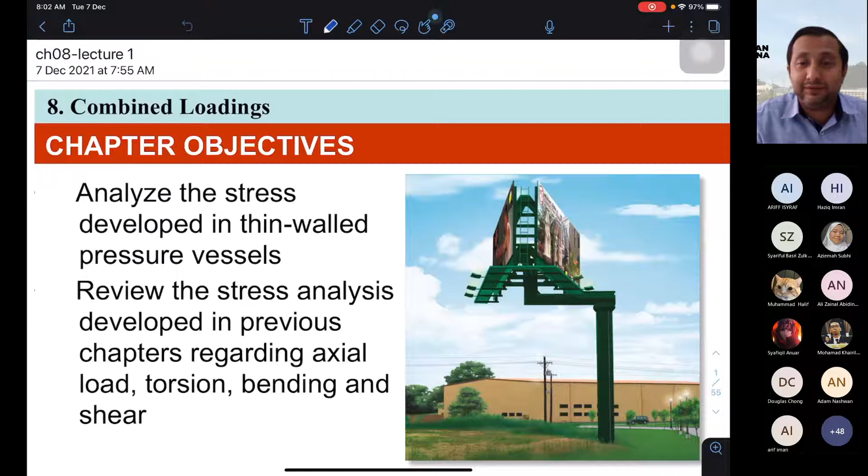Hello? Hello? Hello, Doctor. Hi, morning. You want me to speak fully in English or mix both also boleh?

Mix. Mix, eh? Okay. So I guess this is our second time we are meeting everyone from last year. Apa? Etika, right? If I'm not wrong.

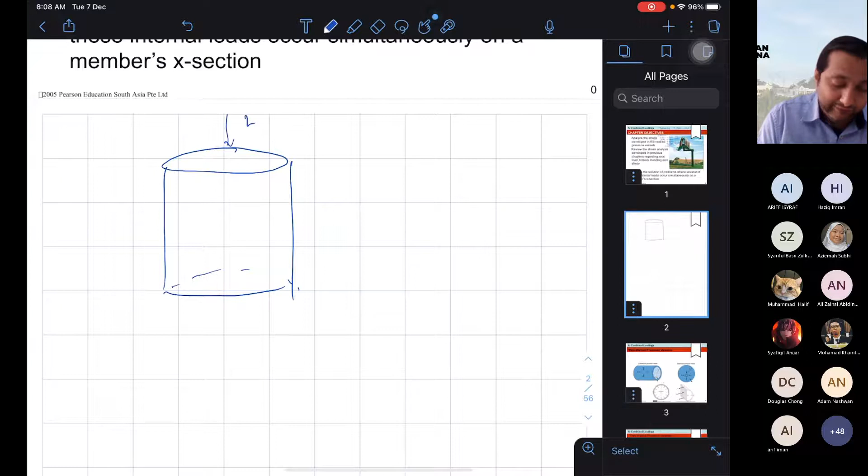Say for example, if you have a thin wall structure, something like this, and this wall structure, you have a certain kind of load, and I want to take one piece here, one component here, so I will always have load onto this, because why? I have a load acting onto the cylinder. It's either thin wall or thick wall, tak kisah. So it will always have a load applied onto the external surface of the cylinder or pipe or whatever.

So we will have two kinds of loading here. One would be horizontal loading, one would be latitudinal loading. So there are two kinds of load acting on a given component.

But if we were to have this place as closed and the load is being applied up here, so we have a normal load, which is P over A. That is two things. We will have an additional of P over A, including the horizontal and also the latitudinal stresses. So this one is what I mean by combined loading.

Say for example, if I have in this kind of case, if I say this is sigma 1, this is sigma 2. So in this case, I will have sigma 1 will be plus with, say, sigma A, it will be sigma A. All right, and also the other one will be sigma 2 plus minus sigma A.

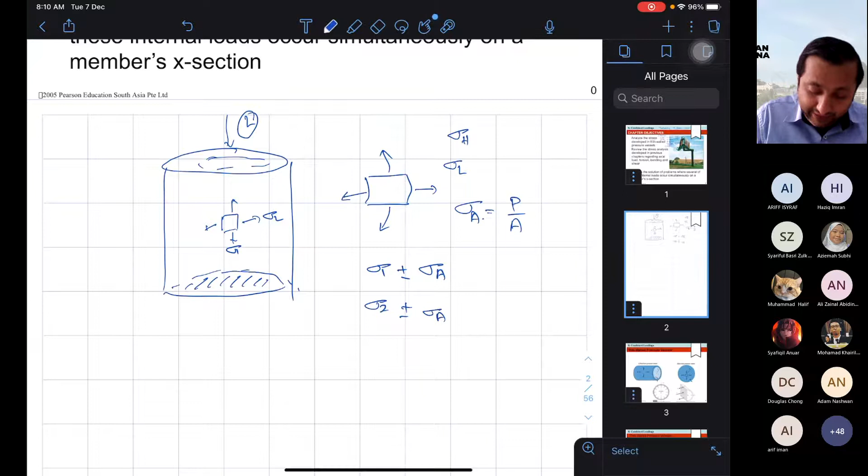Because why? We have to see the difference between the normal load and also the horizontal and latitude loads acting onto the given cylinder. So when a cylinder is being applied load, obviously there will be a combined loading of two loads. One is the horizontal plus minus the normal load, and also latitudinal load plus or minus the normal load.

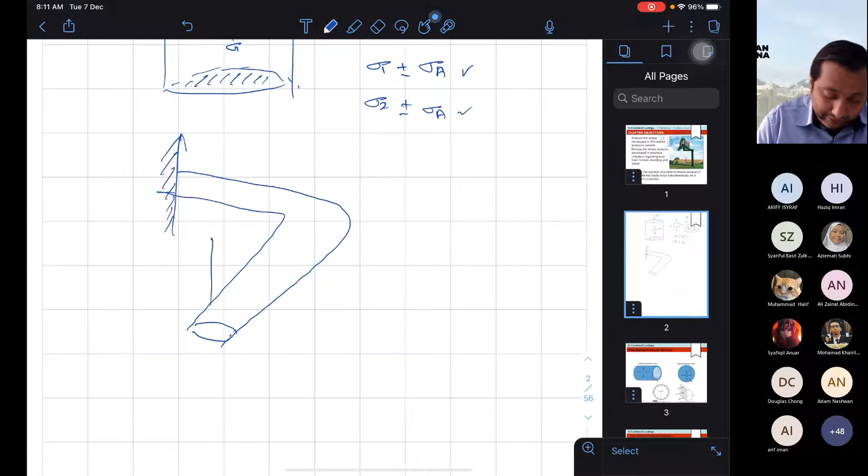But say for example, if I have a shaft, something like this, round, fixed to a wall. So if I apply a load here, so when I have a load here, obviously I will automatically have normal load, which is on the surface, plus minus with the bending moment.

This is actually caused by two things, because when you have a normal load acting onto the component, it will obviously incur bending moment onto the given part. So it's either plus or minus the bending moments or bending stresses of the component.

So we have to say, for example, when we have bending moment and bending stresses, how do I calculate my bending moment and bending stresses? Bending moment, you know how to calculate, but bending stresses will be MC over I, where C is from the centroid and I is the second moment of inertia. So that is how we calculate my bending stresses here.

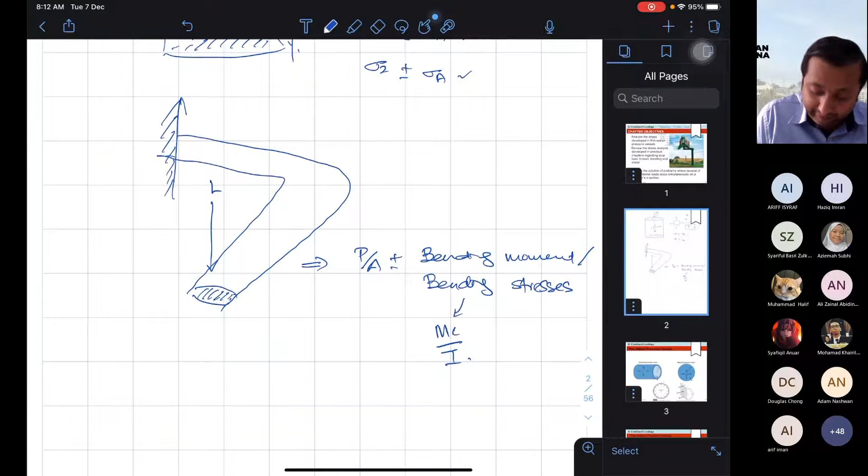Say for example, bending stress. But what happens if I give you a cuboid, something like this? And I give a cross section somewhere here. This is point B, this is point A, for example.

Okay, we have two cross sections and I apply a load given here, or I put a load at the end here. Say for example, on here, load over here. So when you just draw this out, take this out, when you put it here, what do you see?

Well, is there one tension, two compression, and three tension and compression? What do you see at the given points?

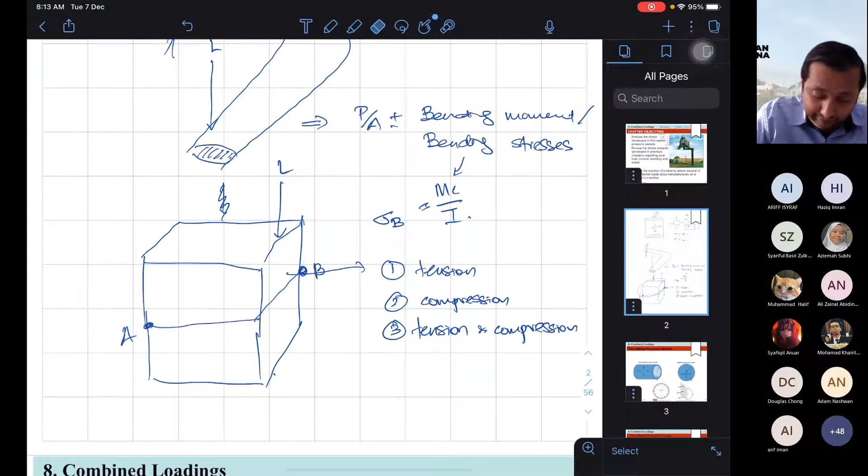Say for example, if I apply a load here, what do I see on point A and point B? Anyone? What do I see in point B? For example, if I have a point here, a point here. So point B, what do I have? Do I have compression, tension, or compression and tension? Which one do I have?

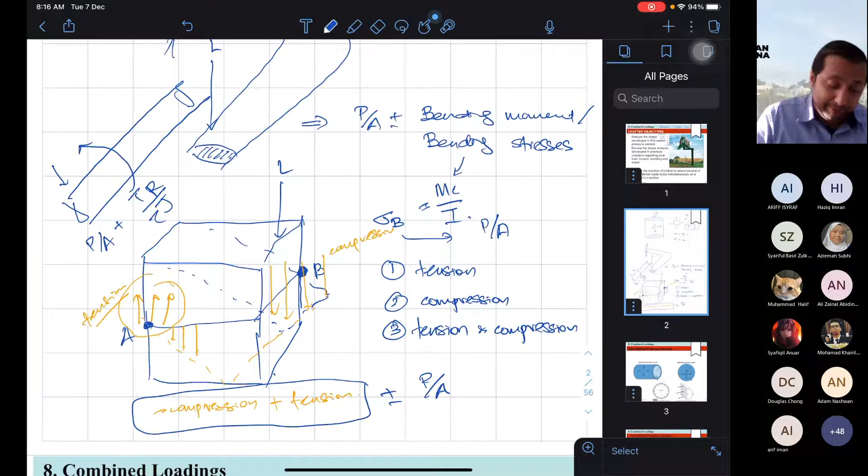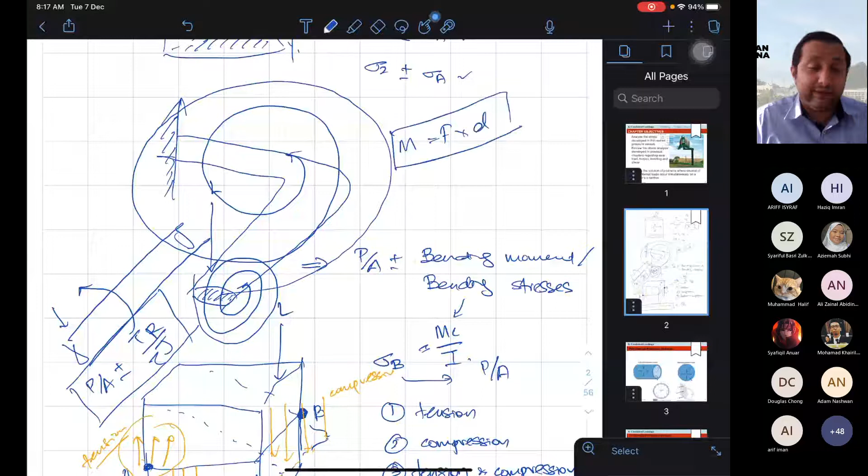So this is what you mean by combined loading. Say for example, if you have a component like this, it is not rotating because it is only having bending moment, because it will bend this way. And if I apply load on this surface, can it have a load this way? Yes, why? Because I will always see the moment. I need to calculate moment. Moment is force times distance. I need to know. So that is how we actually see combined loading.

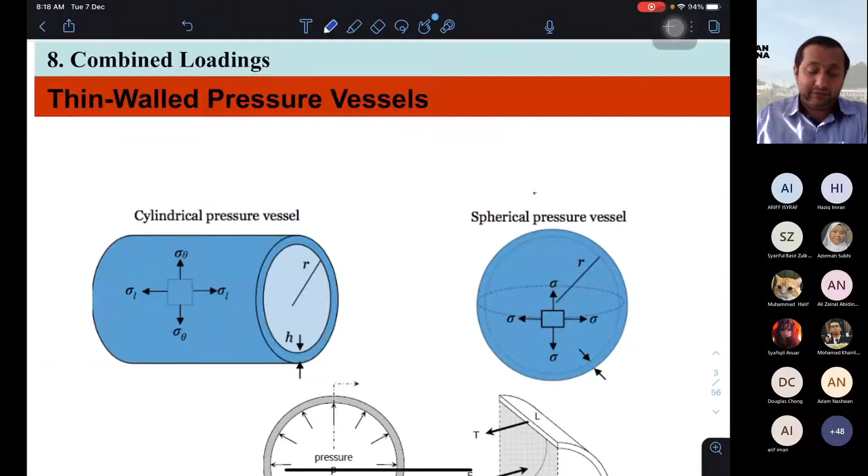Okay, so now we go a bit further. Then we look at thin wall pressure vessel. When we talk about thin wall pressure vessel, we understand when load is being applied onto the pressure vessel. Just imagine if I have a shaft like this, just ignore the inside part. So if I have a shaft like this, where do you think the load is being applied, or the pressure is being applied? Is it latitudinal and horizontal, or just latitudinal, or just horizontal? Which one? If it's just sitting static like this, so where do you consider, in horizontal or latitudinal?

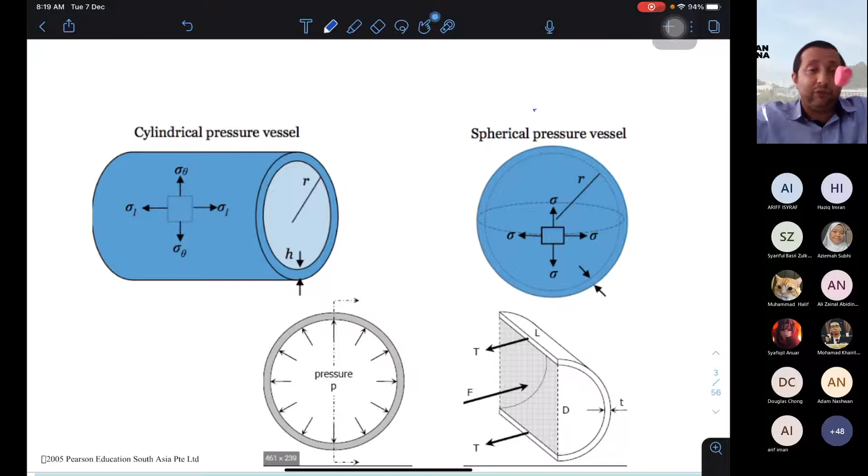Aina Madria, where do you see the loads? You see horizontal, latitudinal, or both? Both, yes, that's true. Because you will obviously have gravitational load, which is acting onto the wall of your cylinder inside. For example, that's why you can see the object inside is in a stable position, it is not sinking, neither is it floating on top. Okay, so that is when we have pressure. So when we cut that, what do you call? If I see both, I will have latitudinal and horizontal stress, even like a pressure vessel. For example, a spherical pressure vessel, or like a ball. A ball also will have latitudinal and horizontal. Why? It needs to have both stresses for it to have equilibrium to maintain its structure.

So now, have you ever wondered why you have a Coca-Cola can? You have a Coca-Cola can, you open it, you drink the water, and then you put hot water. What will happen if you put hot water inside the Coca-Cola can? You finished drinking the Coca-Cola or Pepsi or whatever, and you put hot water into the can. So what will happen?

Badrul Akmal, is Badrul here? So what will happen if you put hot water inside? Where is Badrul? Badrul? Oh, Badrul. Anyone? What will happen to the can, for example?

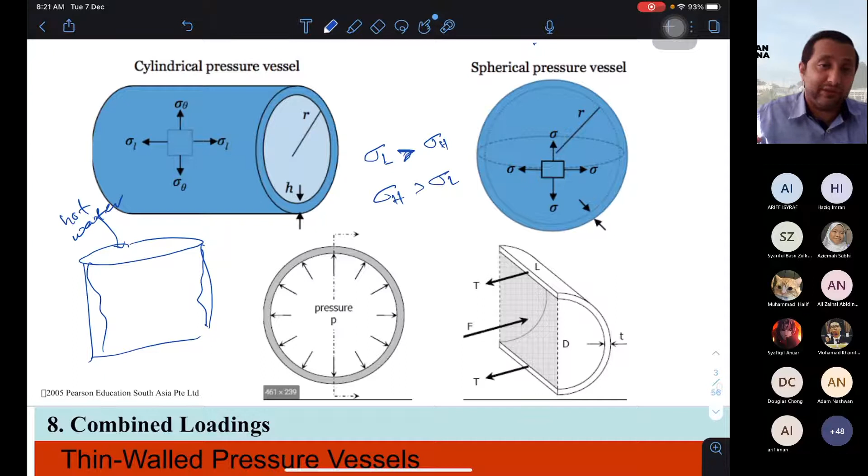Okay, so when we talk about thin cylinder, we will have, for example, sigma 1, which is PR over T, and sigma 2 would be PR over 2T. Why? When we talk about sigma 1, it is always acting onto the surface.

All right, that is sigma 1. Sigma 2 will act here, if you look at the cylinder, onto the circumference of the cylinder. So therefore, we will always use sigma 1 to represent PR over T, and sigma 2 equals PR over 2T, double the thickness.

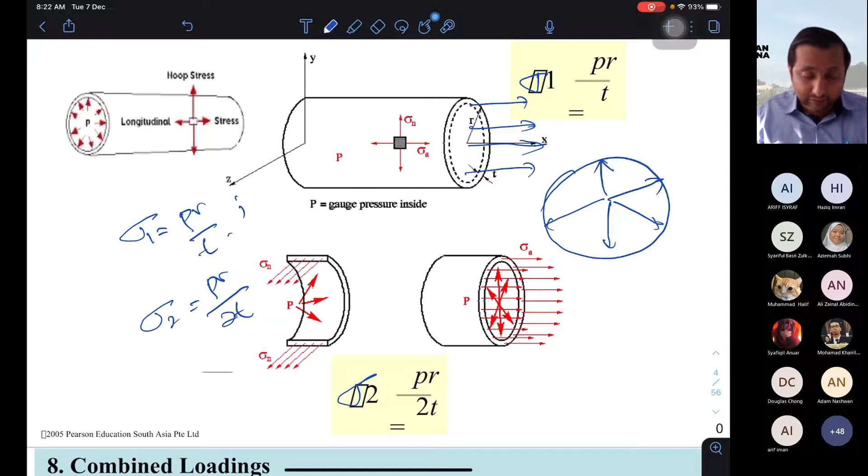So this is how we see our combined loading. If we have a thin wall structure, for example latitudinal stress, we will always calculate as PR over 2T. And if it's a thick wall structure, we will always use this one.

So can anyone tell me how do I differentiate thin and thick wall structure? How do I do that? Anyone? Ratio between RO and RI. Okay, RO over RI. So what is the ratio supposed to be?

And then comes the second question: how do I know what is the ratio? First we know, okay, we know. The thing is thin wall or thick wall, we say based on the ratio. But how do I know? Anyone? How do I know?

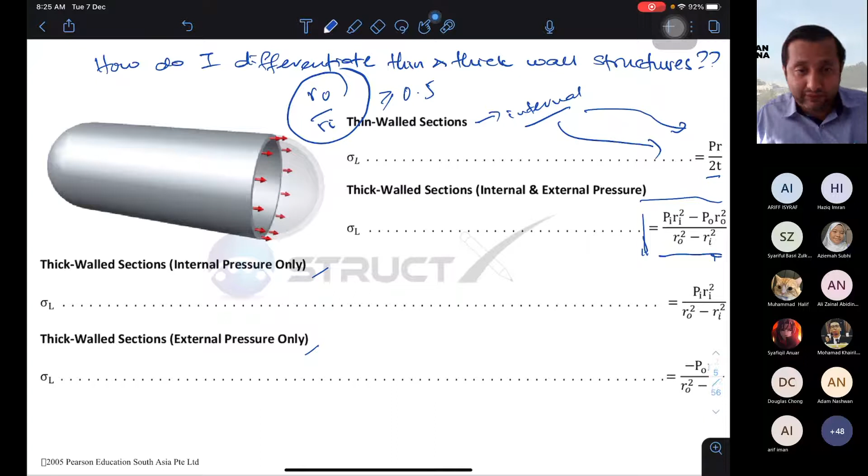So therefore, if anyone asks you, can you calculate for thin wall for internal? Yes, I can, because it's the same. How about the external? Yes, it is also the same, so I can use this. But for thick wall, internal pressure, we have two equations we have to use.

Sorry, that's not that visible. Okay, we have to use this. So there are two, right? So when we look at this, average shear stress, okay. Then with this, I give you a simple example. Let me just add a page.

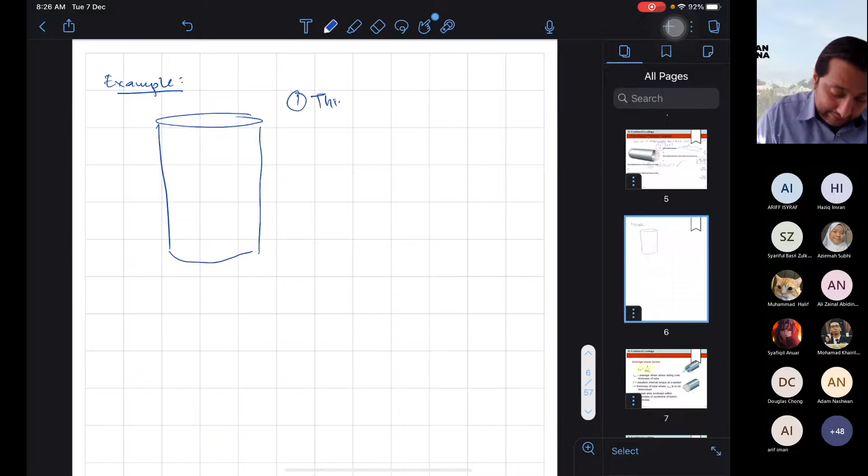Okay, add page. Say for example, if I have a tank, a cylinder tank example. If I have a cylinder tank, all right, I know it's a thin cylinder. One thin cylinder, or thin cylinder pressure vessel, subjected to internal pressure.

It has internal pressure of, for example, 600 kilopascal, and the diameter of the tank is 500 mm. Okay, and I know the thickness would be 6 mm. There are two: one is the internal pressure, and I know the diameter is this one, and also the thickness.

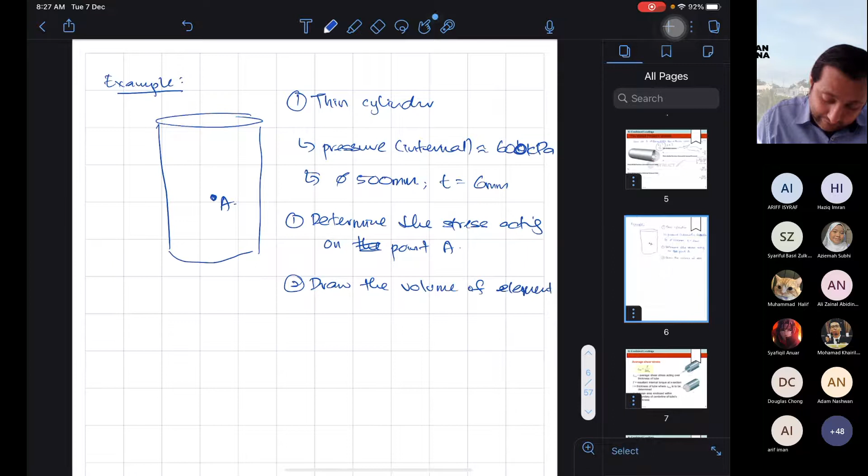So in order for me to do this, I need to determine, first, the stress acting on the given point, say for example this is point A. And second, I need to draw the volume of element at this point, element at point A, for example. I've got two things to find.

So in order for me to determine the stress, I know it is a thin cylinder scenario. So if I know it's a thin cylinder scenario, then it's no problem. I know my stresses: sigma 1 would always be PR over T, and sigma 2 would be PR over 2T. So I know this. But what happens now? I will replace my values.

Pressure being applied is 0.6, because we changed to megapascal. Radius we changed to m, so it is how much? 550 divided by 2, sorry 500 divided by 2 is 0.25, divided by how many? Sorry, 600. This one is divided by thickness, thickness is 0.06. So I will get approximately how much?

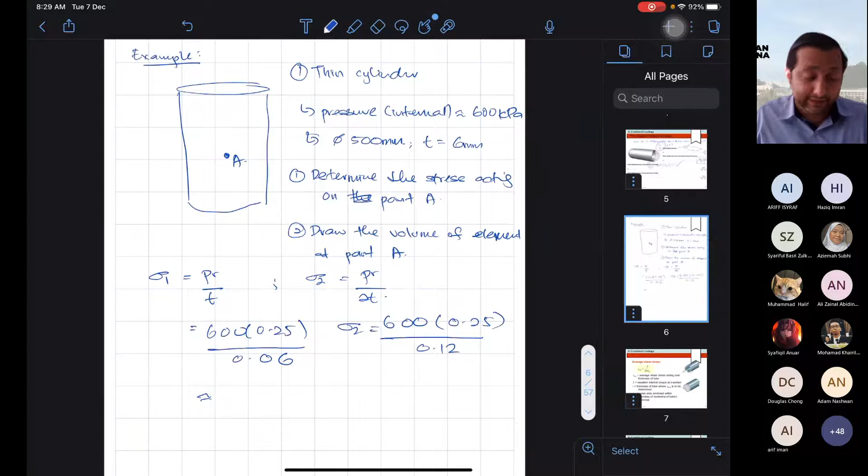So whereas for this will be the same. Sigma 2: 600 multiplied by 0.25, divided by 0.12, because why? I multiply my thickness double. So when I have this, what would my sigma 1 and sigma 2 be? Anyone can tell me, please? I don't have a calculator, I can't press the buttons. So what would your answer be? The answer should be in megapascal, yeah? So what would that be?

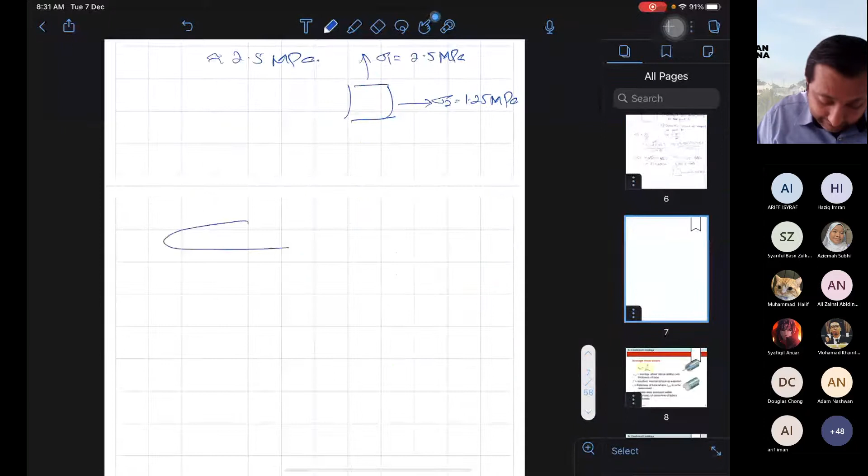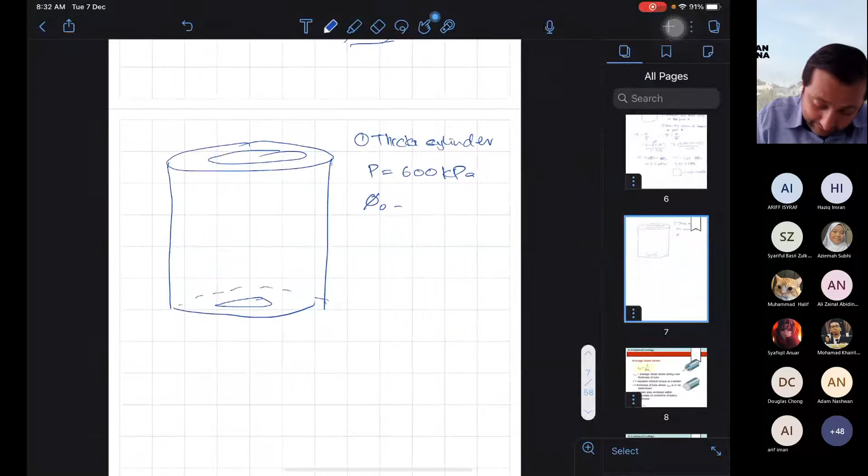So this is a very simple example, but the same example, I give back the same. So I can just draw back the same cylinder. Now we know it is a thick cylinder. I say one thick cylinder. Same thing. Pressure being applied is 600 kilopascal. And then diameter outer is 500 mm, diameter internal is 250 mm.

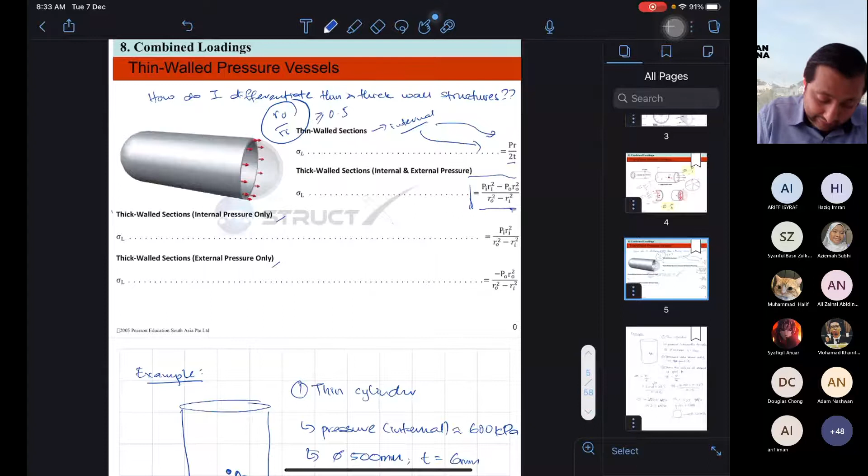So now we know it is another case of thick cylinder. So where was the equation earlier? Can I calculate the thickness of this one? Can I calculate the longitudinal stress? I want to know longitudinal stress. Is it possible? Yes, it is possible. Why? Because I just go back and look at the equation.

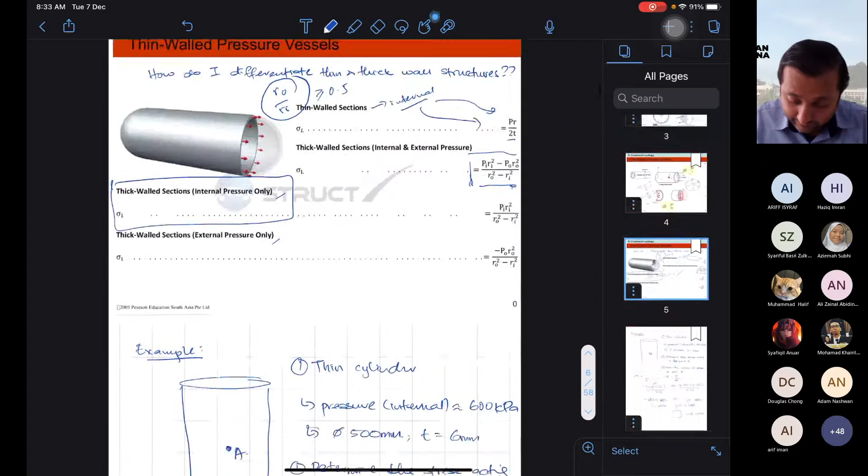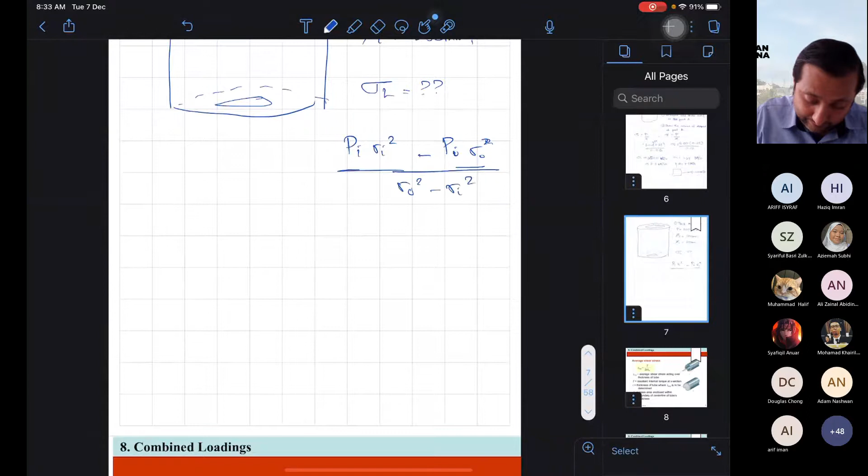What was the equation earlier? Okay. Minus, over. Okay, so it is based on this equation. I want to see the internal and also external pressure. If I want to see the internal pressure, I use this equation. Simple, directly. If I want to know the external pressure, I use this equation. Same. So this is a combination.

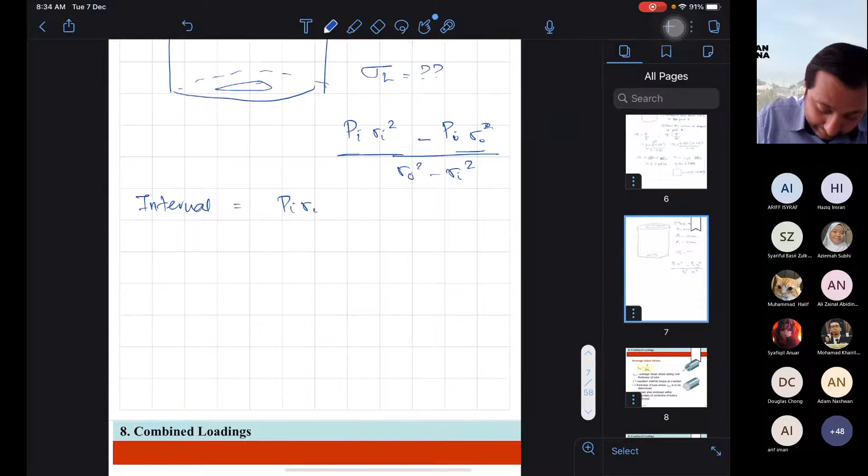If I want to know internal, it will be, going back to the equation, Ro minus Ri. If I want to know external, it will be negative. Okay, great. So can someone please calculate the internal and external pressures? This one is diameter, so radius will be 250, and radius will be 125. Can you calculate for internal and for external? I'll give you a few minutes.

300. Sorry? 300 kilopascal. 300, great. Kilopascal, eh? Yeah. So it will be 0.3 megapascal. Okay, great. How about the external? How about the second one? After this, there is one more example for thin cylinder. Then we go to combined stresses.

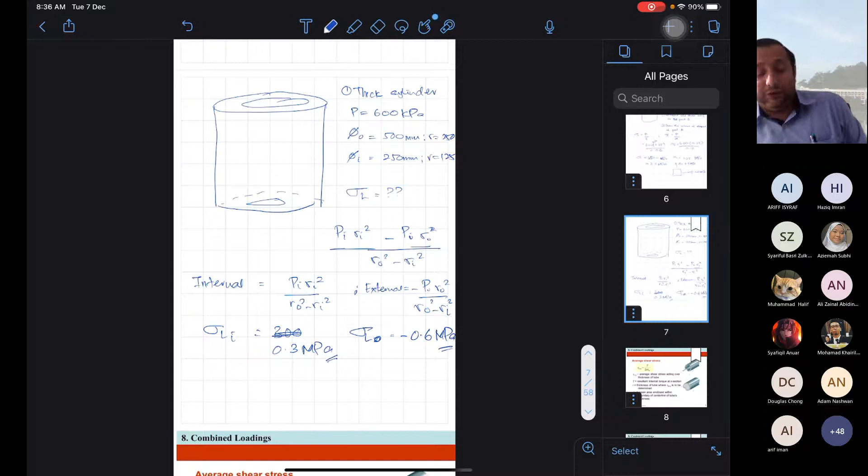Negative 600. Negative 0.6 megapascal. Always remember, please keep your answer in megapascal, don't keep it in kilopascal. Right, so this is how we calculate internal pressure and also external pressure for a thick cylinder. Quite simple. So, what if I have one more question?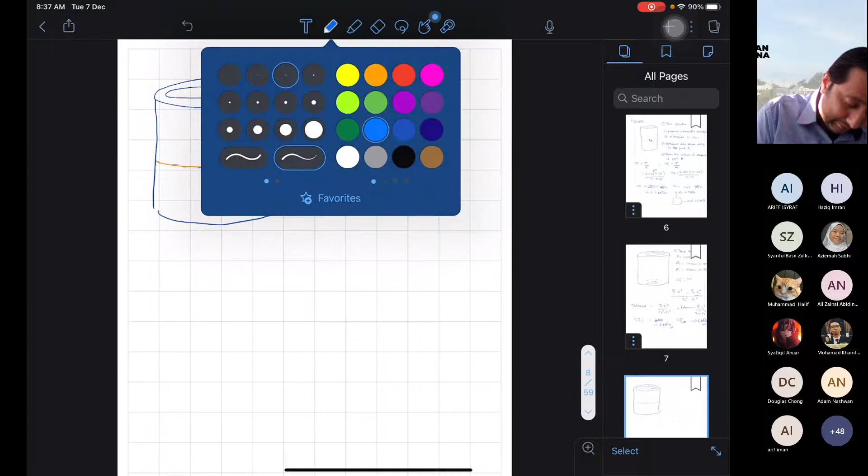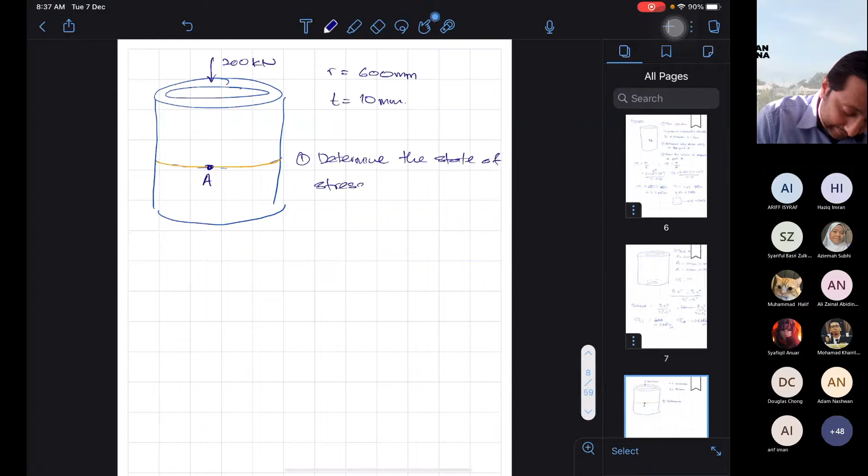Say I have a gas tank, for example. Say here is point A, and I know 200 kilonewton is being applied. We assume this is a thin wall cylinder. Radius is 600 mm. Thickness is, say, 10 mm. This is quite simple, just one only. Determine the state of stress at point A.

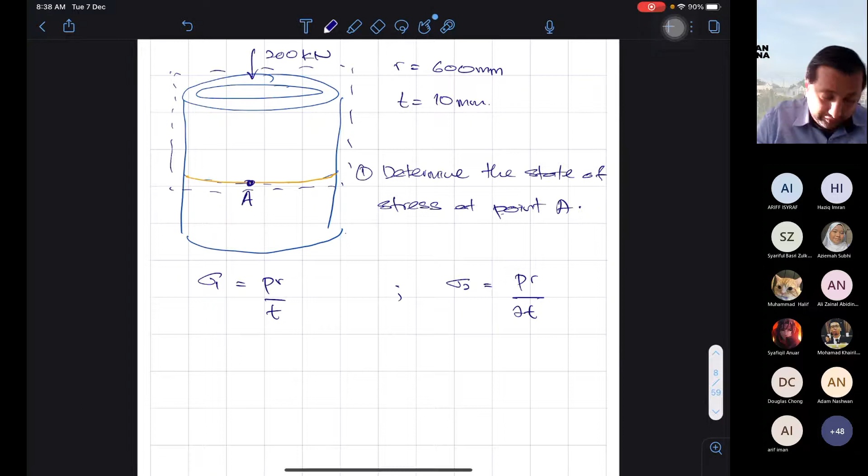Now I want to determine the state of stress at point A. When we look at point A, we know this is a thin cylinder issue. I will always have two things: sigma 1 is PR over T and sigma 2 is PR over 2T. So how do I determine the state of stress at point A? Say I cut this thing out, I have something like this.

Something like this, right? And then I have the bottom part here, which is at the bottom already. Okay, something like this. So I know I apply 200 kilonewton here, and I know I have stresses here. Stress 1, stress 2. Stress 1 is what stress?

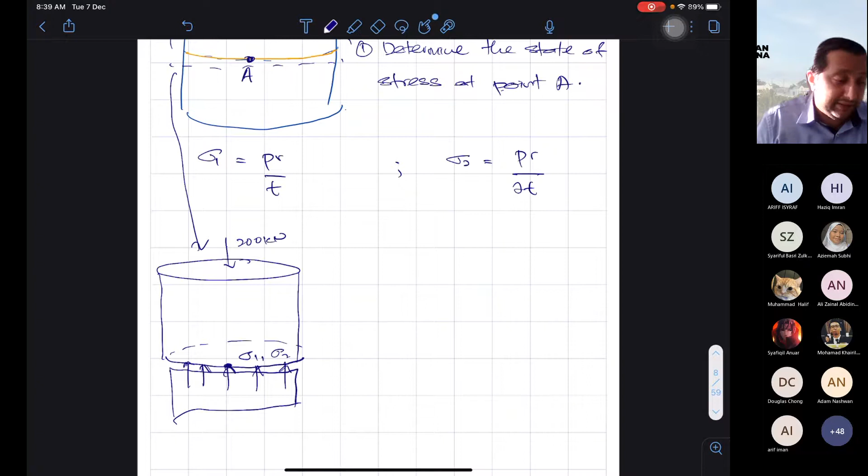So with that, you know you will have plus minus P over A. Because why? Now we assume going down load is positive, acting opposite direction to be negative. So therefore, for the first state, stress is okay, because it is acting here on the hoop of the cylinder, so there's no issue. You will not have any normal stress.

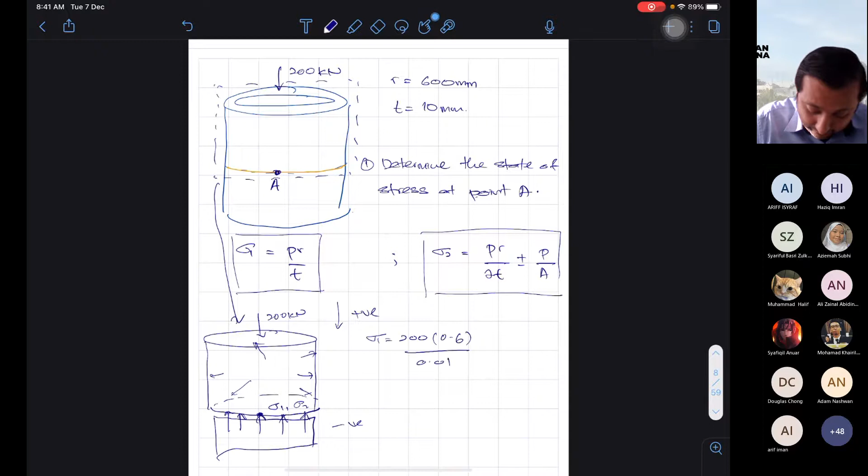But when you talk about this one, you will obviously have normal stress, because you need to maintain the stability or the integrity of the given structure. Therefore you will have a normal stress included into this given cylinder. So let's calculate for stress number 1. Stress number 1 would be pressure, 200 kilopascal, radius around 0.6, divided by 0.01. So you will have sigma 1 as your answer.

How much? And sigma 2 you will have 200 times 0.6 over 2 times 0.01, plus minus P. P would be 200 also. A would be the area. Area will be pi r squared, r will be 0.6. Okay. So for the first one, how much will you get? How many megapascal? 12 megapascal. Okay. So how about the second one?

How about the second one? Second one, this would be 6 plus, positive or negative? That one we have to see our vector. If we say our loading is positive towards down, therefore the normal load to maintain the stability or the integrity of the component will be acting onto the negative region. So therefore it will be minus 200 over the area. So how many megapascal will you get?

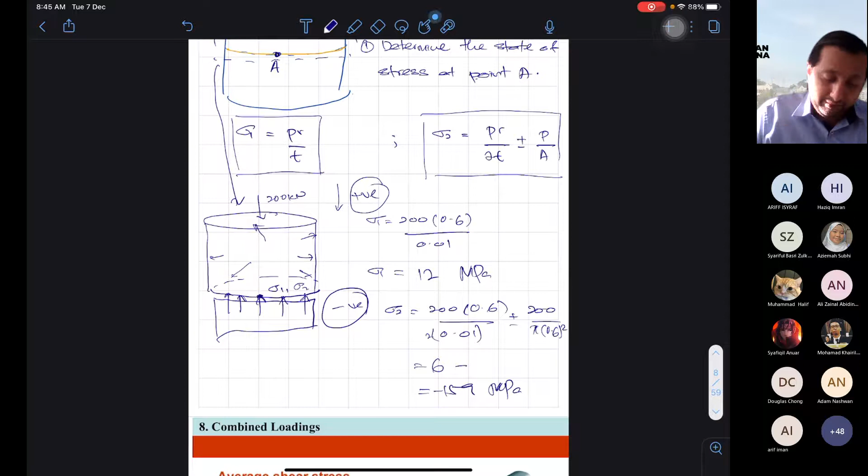But one thing, we're going back up again. Where were we? Pressure vessel. How do I differentiate thick wall and thin wall? Is it the ratio of internal over external? The rule of thumb to determine whether it is a thin wall or thick wall is the radius over the thickness of the wall. So if the radius is bigger than the thickness of the wall, hence it will be a thick wall structure.

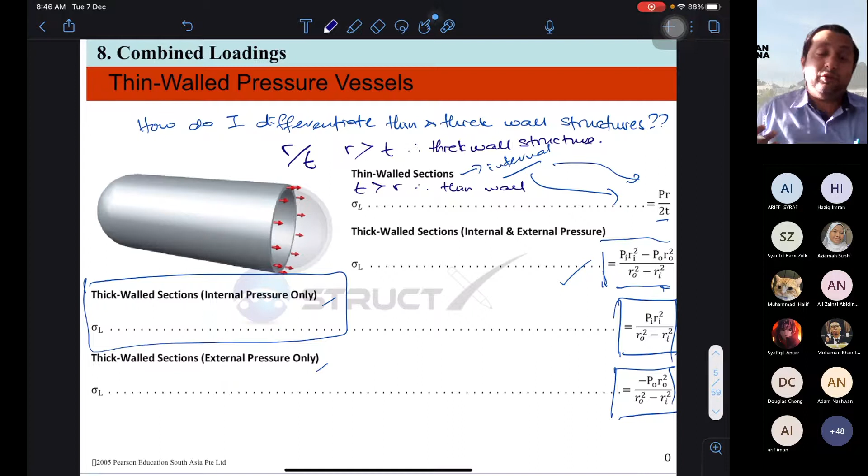All right. If the thickness is the other way around, therefore it is a thin wall structure. So this is how we explain whether a cylinder is a thick wall or a thin wall structure. Okay, so I've given 3 examples. This is a very classical example of combined loading. All right, so now we look at combined loading.

Combined loading, we have average shear stress, which occurs on the surface of the component being applied the given load. So the average shear stress acting over the thickness of a tube, and T will be the resultant internal torque at the given section. If this is a section, there will be a given torque because it is under rotation, and also the thickness of the tube, where the average is determined based on the mean area enclosed within the center line of the tube's thickness.

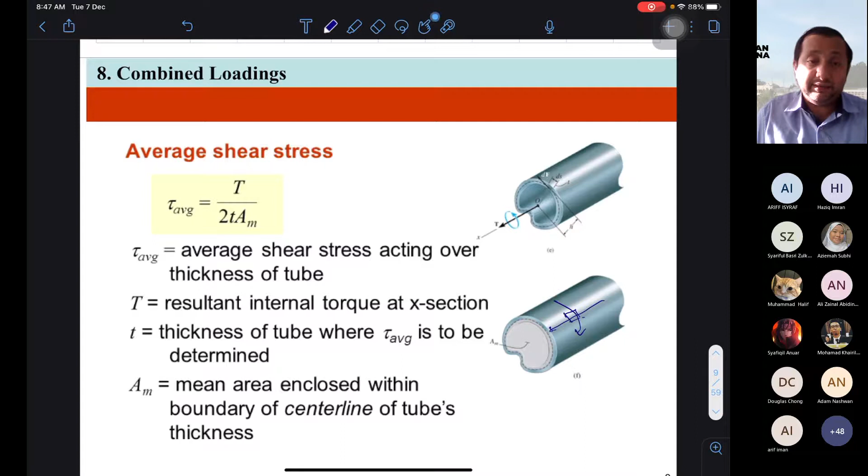So when we look at the first example like this, I know this is my given point, point A. If I'm given a load perpendicular to the normal surface, I will have a bending moment occurring. When I calculate the bending stresses, I use MC over I, where I is the second moment of inertia. But if it is rotational, I will use TC over J, where T is the torque, C is the distance to the point, and J is the polar moment of inertia. Right, just give me a second.

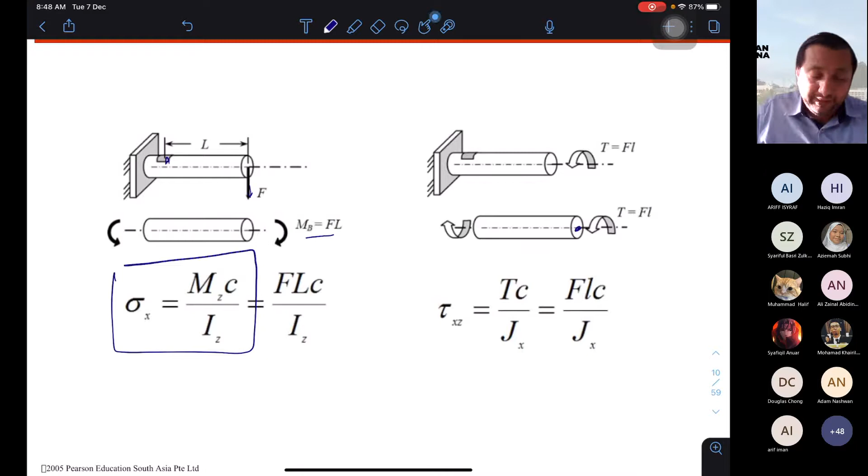All right, so that is how I determine the state of stresses based on the combined loading. But what happens if I have a state of this one? Oh, sorry. Okay, if I have something like this, and I have X, Y, Z, Y, X. Okay, so how many kinds of moments do I have here? Do I have MZ, MX, MY? Am I right? I will have all these three. Or no? Or do I only have MZ if I have loads in three directions?

How many bending moments would I have? If I have three loads, how many bending moments would I have? Class? Azeemah Subhi? Maybe 3, I guess. Yes, 3. Because when you have 3 loads, you will obviously have 3 bending moments. So if I were to put my bending moment here, this is my MZ, MX, and MY. So how will the moment be? Will it be rotating clockwise or anti-clockwise?

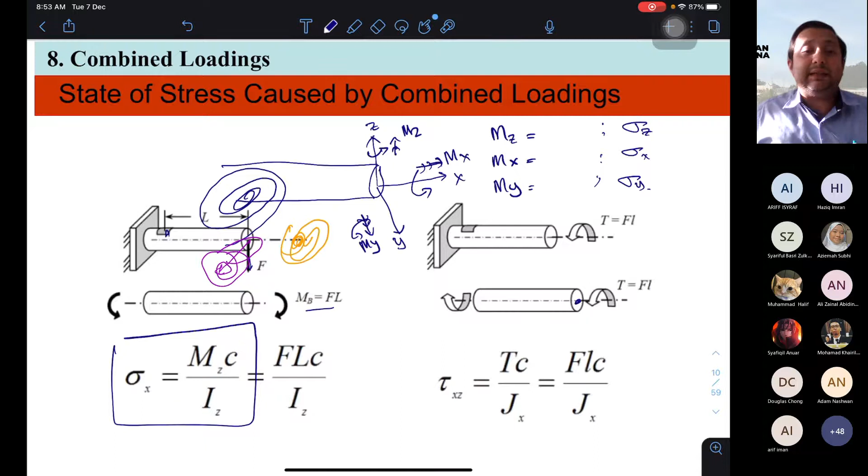So when we look at combined loading, we have forces perpendicular, F over A, some say P over A. I prefer P over A. Bending will be MC over I, whereas the shear stress will be VQ over IT. Q is calculated with A prime and Y prime, so we have to know A prime and Y prime. And for torsion, for normal stress there will never be torsion. For a rotating shaft, you will have torsion based on the given torque and the polar moment of inertia. Pressure vessel is practically normal stress.

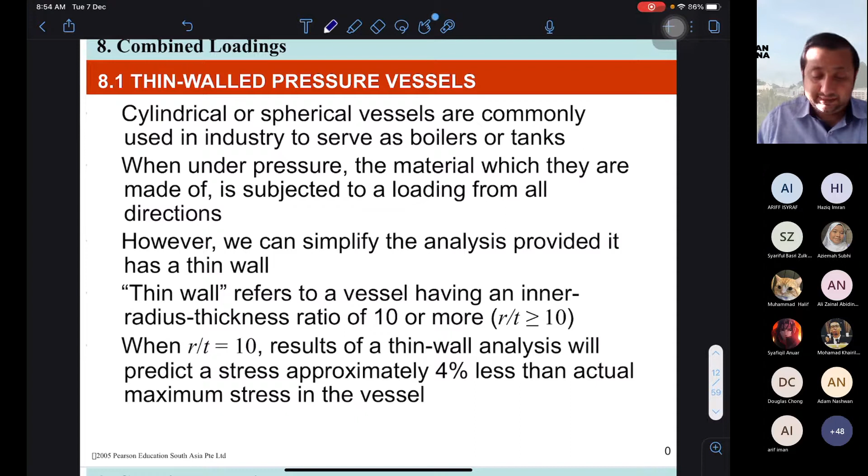Okay, so combined loading. When we talk about thin wall, it refers to a vessel having an inner radius to thickness ratio of 10 or more. So like I mentioned, we have R over T. Then only we know whether it is a thin wall or thick wall structure. With thin wall, the assumption is that the thickness of the pressure vessel is uniform and constant. If it is different, then we cannot calculate it.

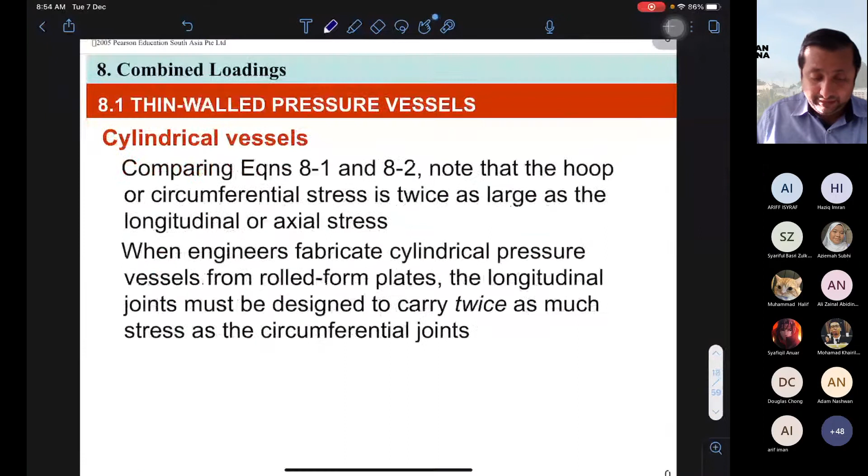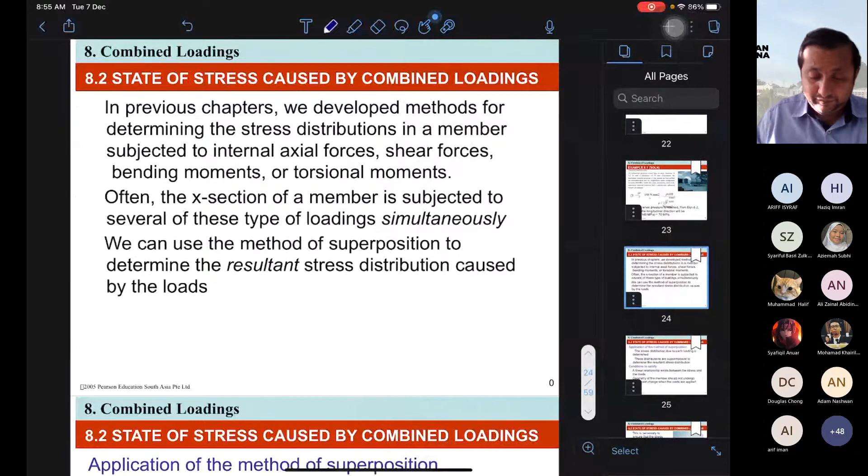Before we go to thin wall, this we've covered. Combined thin wall, we've done the example. Cylinder, yes, and radius for cylinder. This is the example we have done; it's actually in your textbook. So I go straight to slide 20. What's this? 23, and I add one page. So now when we look at a cylinder, we know a pipe.

Okay, a pipe is fixed. And this pipe is to transport, say for example, oil. Oil coming in. Okay, we know the diameter is 4 mm. The thickness is 0.2 mm, for example. And it carries oil or water, whatever, a load of say 0.6 megapascal.

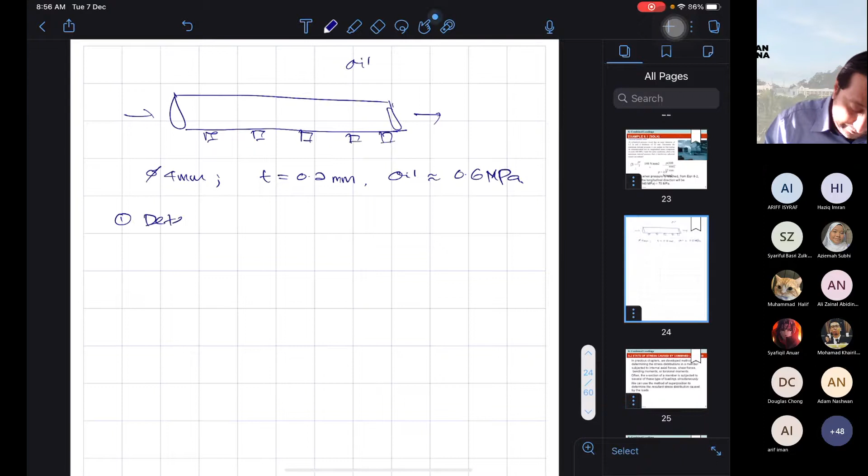Okay, now I want to determine the state of stress in the walls of the pipe. So now I know this is a pipeline coming from a refinery, an oil pipe, and I know it has a thickness of 0.2 and this diameter. So what I need to know is how to solve. We know how to calculate.

We know it's either using PR over T or PR over 2T, because why? It is occurring along the entire part, and I'm not concentrating on a given point, not even point A. No, it is not a given point, it's for the entire pipe. So when we talk about the entire pipe, we know there will be either this or this. But it goes back to the question. Thick or thin? So how do I solve this?

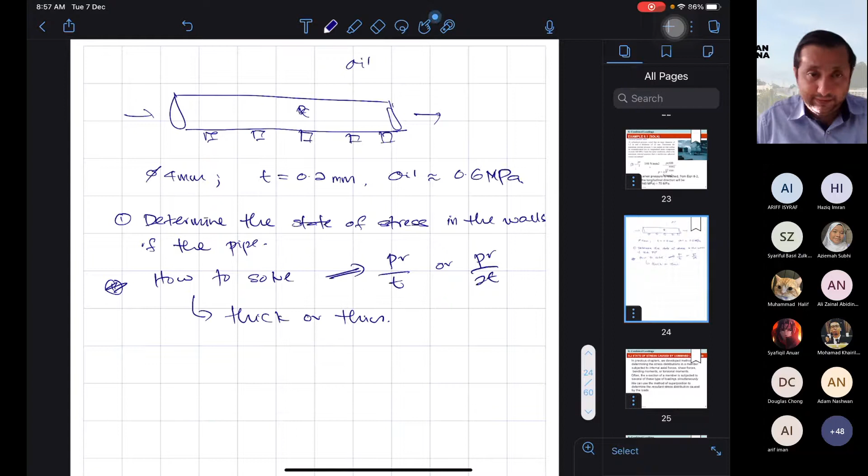Thick or thin? Thin. Why do you say thin? Because it's exactly a ratio of 10. Exactly? What's the ratio? The ratio is 10. Okay, exactly then. So when we say the ratio is equal to 10, approximately 10, we say we use what? Thin. So when I say thin, I can always fall back on this or this.

Okay. Now, the question is, which one should I use? Should I use sigma 1 and sigma 2, or sigma 1 only, or sigma 2 only? Which one? We have to look at the pipe itself. If the pipe has open ends, open here, therefore we do not need to calculate this. Please bear in mind, if a pipe has open ends on both sides, left and right, that means we can consider there is minimal load applied for the second stress. So therefore, we only calculate PR over T. Alright?

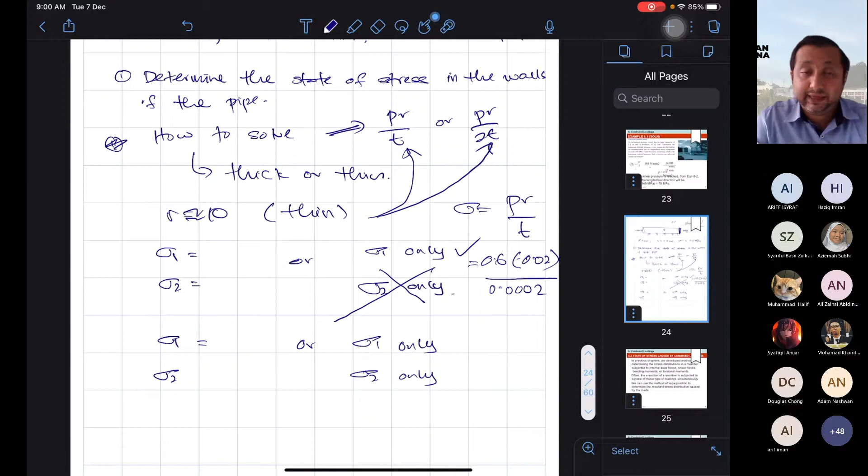Earlier I said because it's open, you only calculate sigma 1. But now in this question, I say it is closed. One side is already closed. So how do I calculate? Both, yes. We calculate this one and this one, because the loads will be acting on the walls horizontally and latitudinally, or some people say hoop stress. Same thing. Alright, that is how it is.

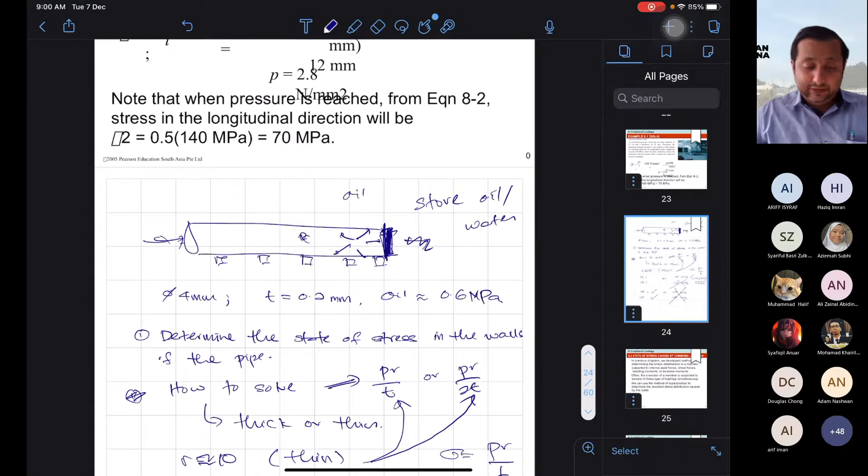Okay. Now we go to see the state of stresses combined, or superposition. Superposition means we have both stresses: normal load and also bending. Then we have a case we call superposition. If it's rotating, you will have normal load and also rotational load. Like earlier, that is considered superposition, a combination of two or more stresses acting on a given point.

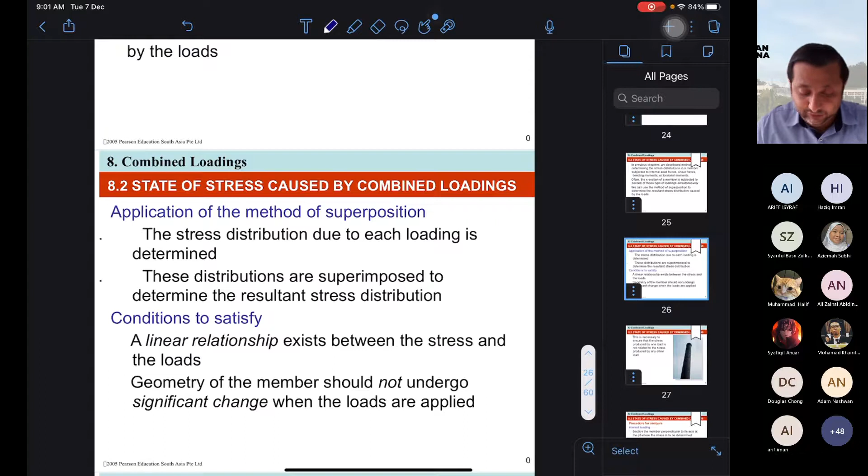So we assume a linear relationship between the load and the stresses, assuming the geometry of the member does not undergo significant changes when loaded. This is how the calculations are, but I'll go directly to an example. This one you can see in the notes; I won't give this example, I'll give another one.

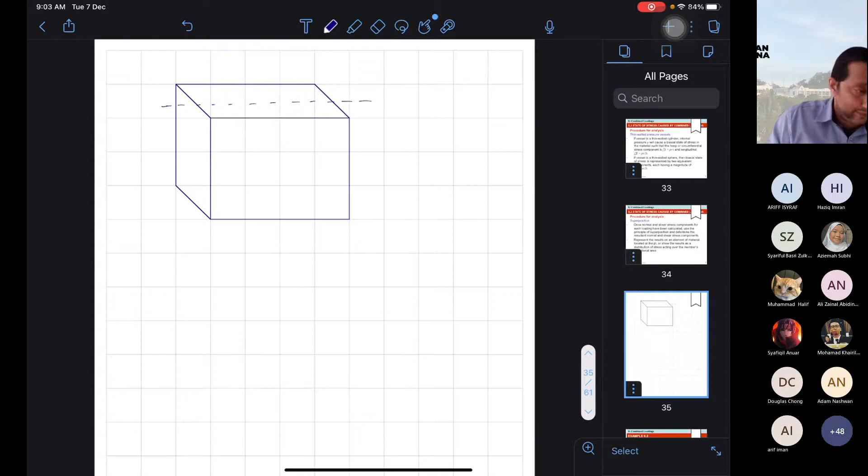Okay. Say for example, if I have a cube. Okay, if I have this, and I know there is this center line. Di tengah, titik tengah. Okay, and I have a load being applied here. I have load at this point, 300 Newton, or say for example 300 kilonewton. I tahu jarak ni, say 50 mm. And I tahu this jarak is 150 mm.

Okay, we have this. So now what happens is ni berkurang. So I have this point acting here, which is here at the front sector. Oh, tak apa, allocate balik, sorry, my mistake. Figure tak betul, sorry. Okay, so draw back. Okay, if I have something like this, much better, correct.

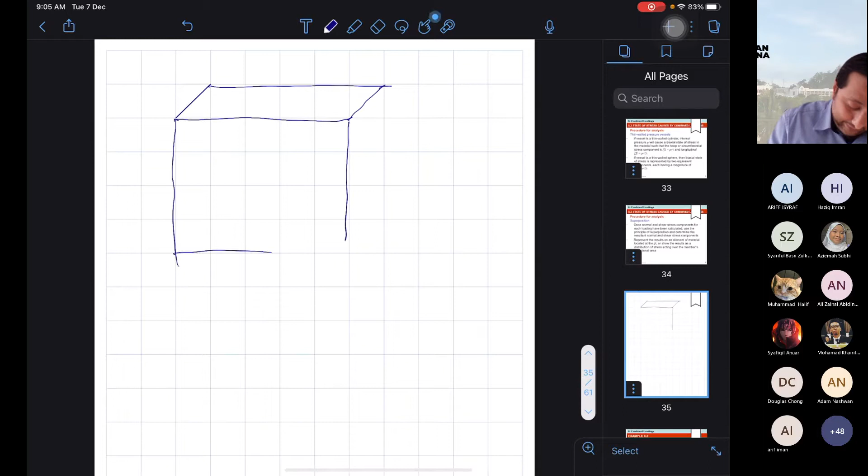Okay, if I have something like this, sama juga, if I have the load 300 kilonewton, and I know jarak dia tengah sini is 50 mm. This is 150 mm. So this is one point in the center, or maybe not center, up to me. So this is point C. This is point B. Okay, we know a force of 300 kilonewton is being applied to the edge, say point A. We know point A at the end there.

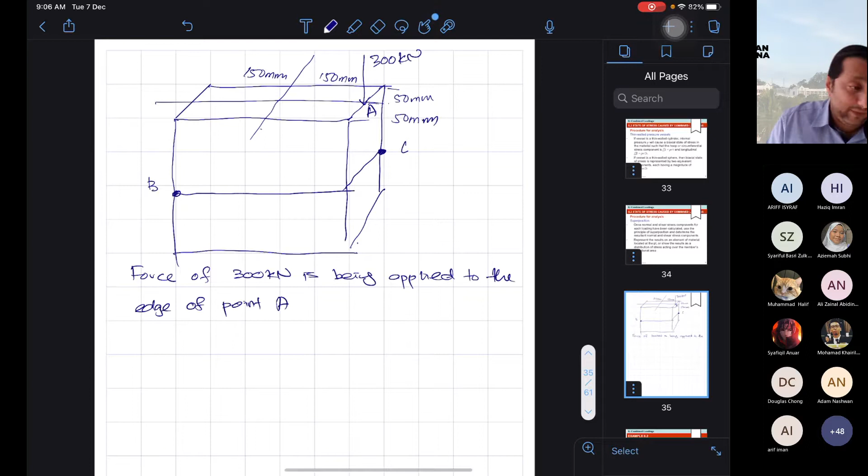So I want you to determine, one, the state of stress at points B and C, both given points. So this one you have to pay attention also. And then second, the distance x based on the resultant force, or the stress distribution. Okay, so we have this. Okay, great.

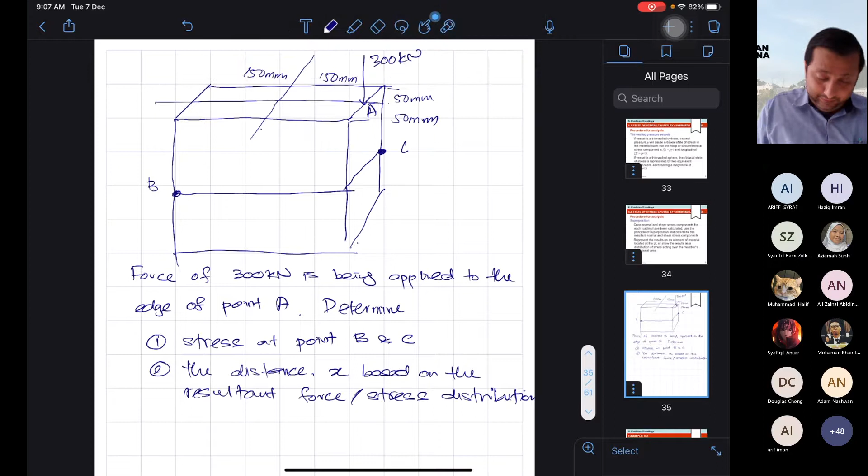This is clear. Apa ni? Okay, we have this. So how do I solve this? What am I trying to find? I'm trying to find the stresses at point C and point B. Betul. But I know what's happening at point A. So how do I do that now?

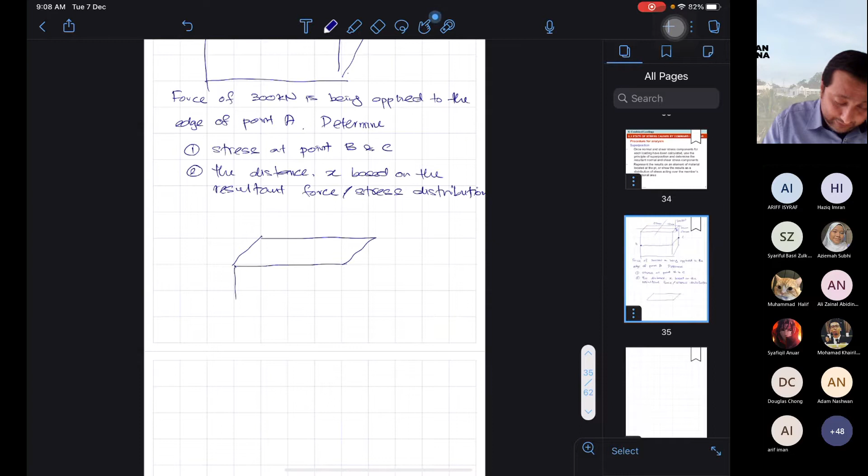So whatever happens on point A will be a resultant from the centroid of the cuboid. It will occur in the centroid of the cuboid. So what will we have? Point C, point B, when load is being applied here, 300 kilonewtons, what will happen to C? Will C move down or move up? Will it have compression or tension? Compression. Obviously, it will start to have compression.

Good. So what about B? B will be the opposite, or resultant load acting in the opposite direction, so takkan dia duduk turun macam ni, because load is being applied at the end. If it's being applied at the end, this will be apa? Tension or compression?

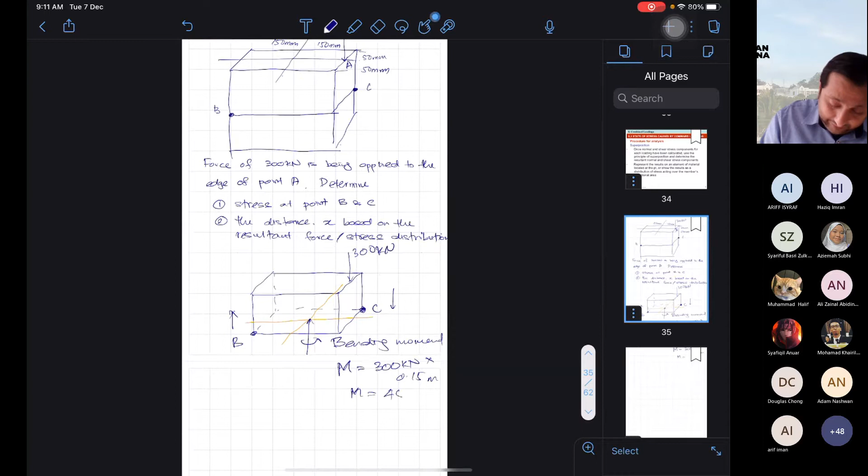So what is the bending moment here? The bending moment is calculated as M equals to 300 kilonewton multiply with the distance, which is 0.15 meter. So you will have approximately bending moment of 45 kilonewton meter. Okay, you following me?

So you have that bending moment. So there are two components to solve this one. One is my normal force, calculated as P over A.

What is P? P is the pressure load being applied, which is 300 kilonewton. A would be the area of the cuboid, which earlier I gave, 0.3 times 0.1, meter square. So 300 divided by 0.03 equals 10,000 kilopascal, which will be 10 megapascal.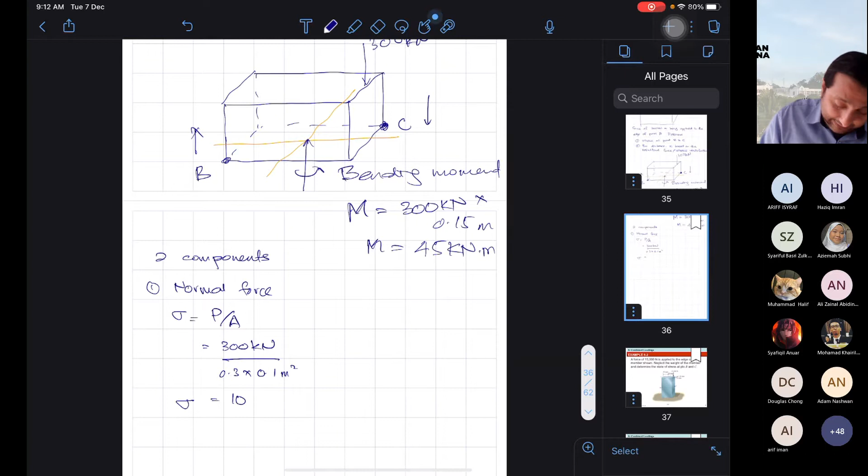Alright, good. So what else? Is there any other load being applied? Yes, when you have bending, will you have a bending stress? Obviously, because when your component is being loaded, there is bending stress in the center, it will bend the component because of the load applied. So when there is a bending moment, there will be bending stresses caused by the load.

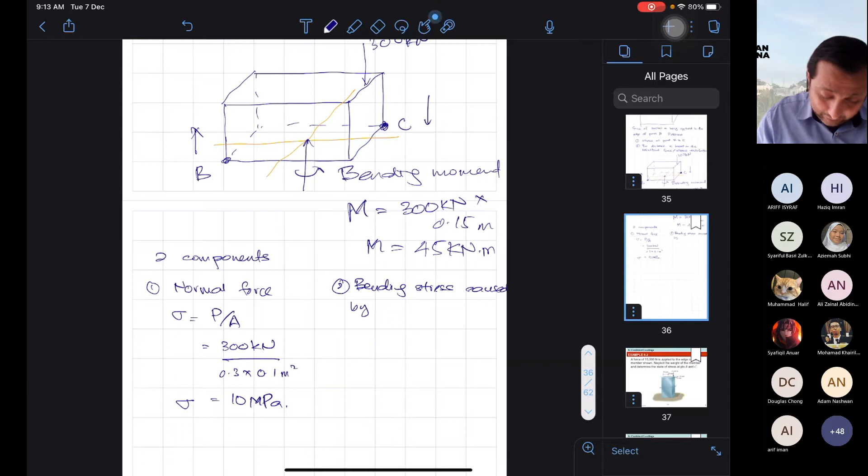So sigma bending maximum would be MC over I. M already calculated is 45 kilonewton meter. C is the distance from the centroid, so will be 0.15 meter. I is the second moment, for cuboid it is 1/12 BD cube. So B will be 0.1, D will be 0.3 cube.

So I know my bending stresses are this one, whatever the number is. Can someone please calculate for me? Is it 2.7 megapascal? Or 30 megapascal? Okay, because we use megapascal to calculate, so settle at 30 megapascal.

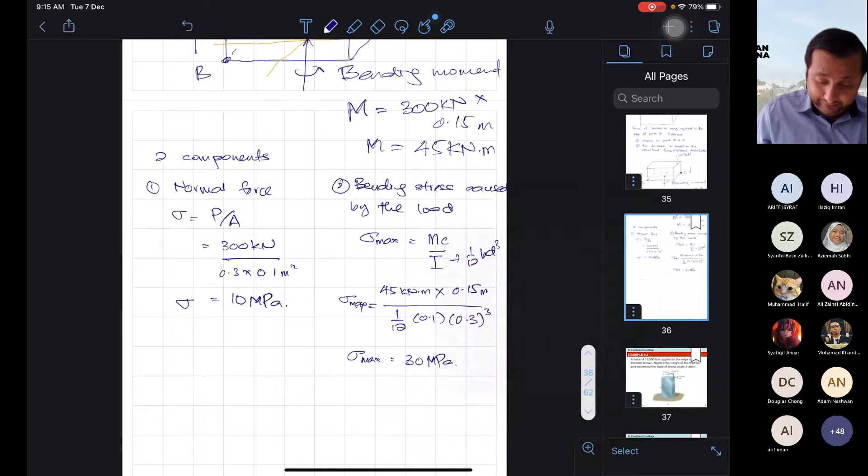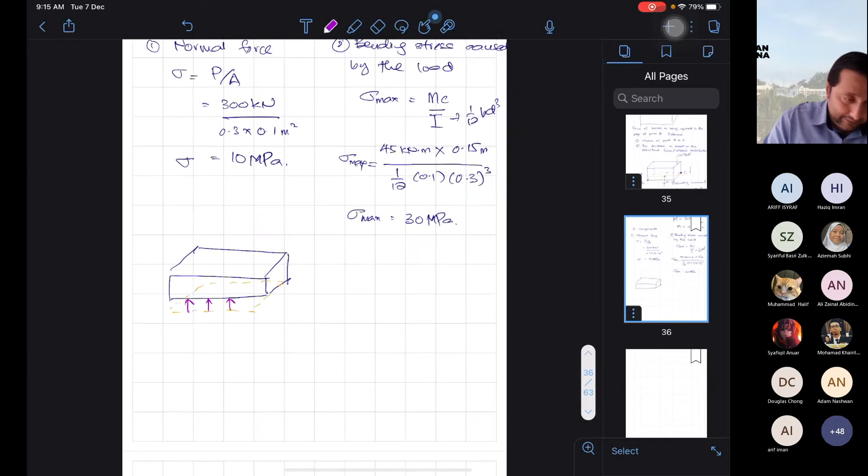Okay, now we know this. Let's add another page. So with this, we know this is your cuboid just now, your structure which I cut out. We know there are loads acting here, in this direction, because it is the resultant loads in the opposite direction. This is A, my normal stress.

Whereas B would be my bending stress. So where was the midpoint just now? The midpoint is here, right? So when I know I have bending stresses, on a general term, in the center, it's supposed to be something like this.

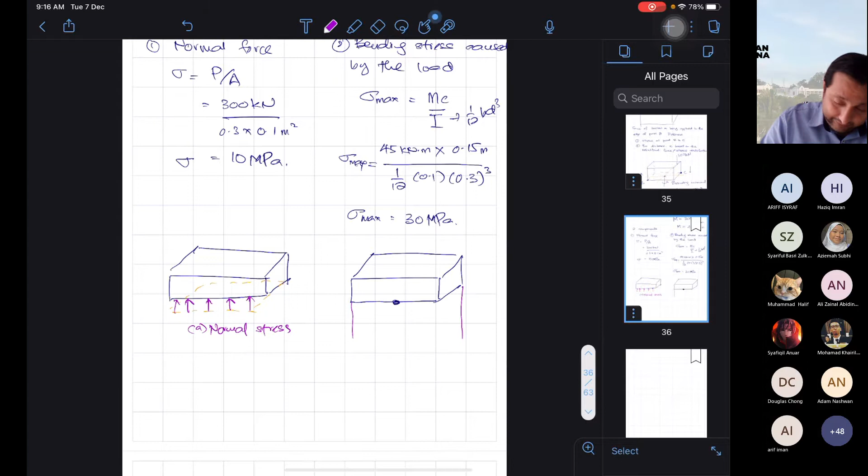So we know the load is acting this way. So if we follow through, it's supposed to be load also acting in this direction, which is equivalent. But now we have to go back to the basic understanding of physics. This is superposition already, must go back to the basics of mechanics, whereby if you have load acting here, automatically this will be an opposite direction, because of Newton's third law, opposite and equal direction.

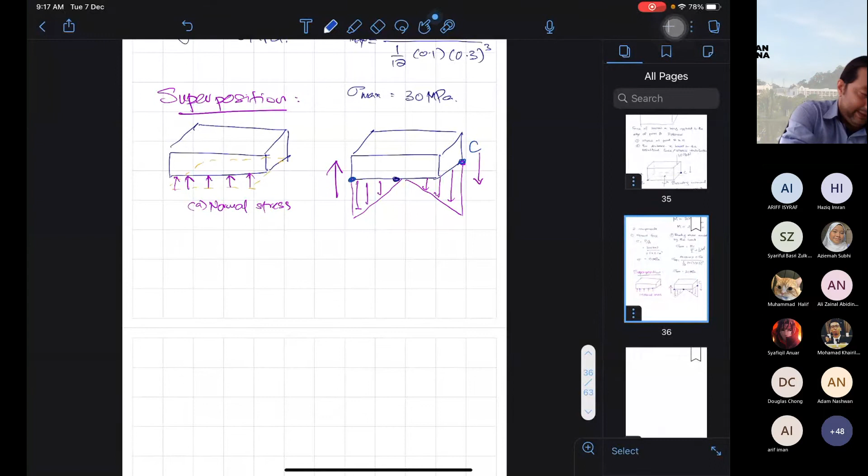So with this, how do I calculate superposition for point A? Where were the other points, B and C? How do I calculate point B and point C? Very simple. For point B, it is normal stress plus or minus bending stress. Point C is also normal stress plus or minus bending stress.

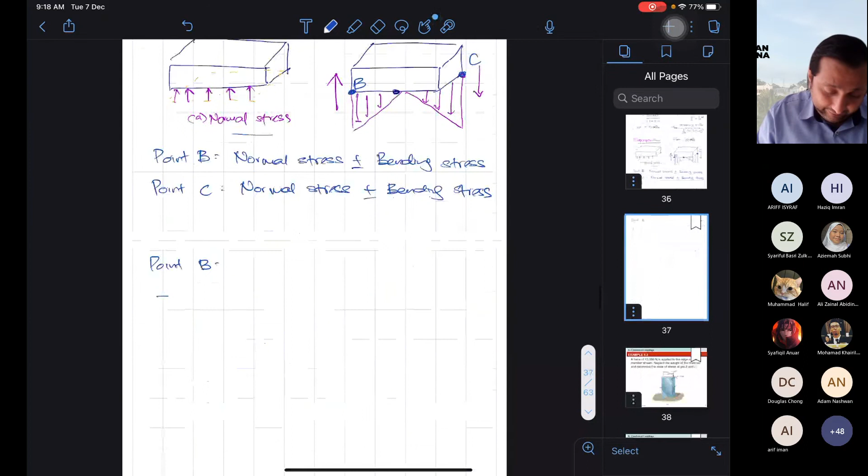Do you agree with me on this? Point B is normal stress plus minus bending stress, point C is also the same thing. This is point B just now. So this is happening, but at point B, we notice the load is acting at the bottom, which we take as positive. So the opposite direction for point B, we calculate for point B first, so the opposite direction would be negative. Normal stress would automatically be negative 10 megapascal plus the bending stress, which was 30.

You will have 20 megapascal. How about point C? Point C, we know, the normal stress is obviously in the opposite direction, which is negative 10 megapascal, plus or minus? Minus, because it is coming down. So coming down, which is your bending stresses, which is 30 megapascal. So you will have 40.

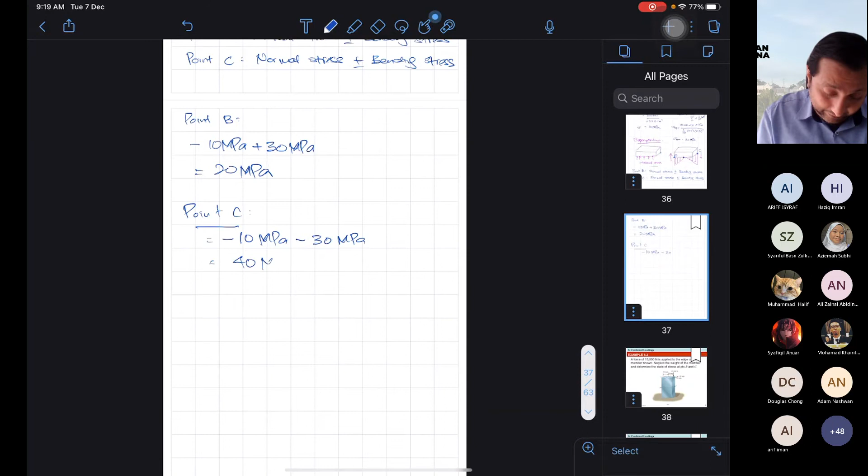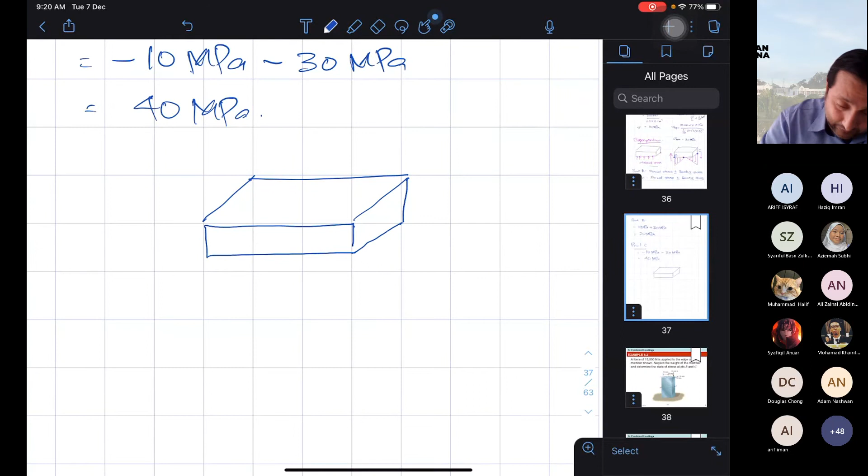Megapascal. So in other words, your stresses have already transformed from this state to something like this. This is 40 megapascal and this is 20 megapascal. So you guys following me still? Yes? No? Yes, yes, okay good, so now you're clear on this.

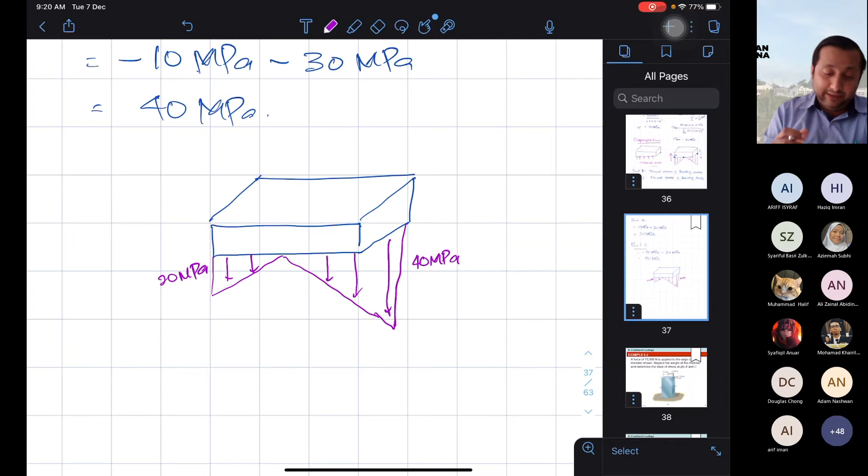But now go back to the second question. What does the second question ask? The distance of x based on the resultant forces. So how do I know? This is no longer your original center point. In order for it to be in a stable position, this point has already shifted so that it will be maintaining its stability. So how do I calculate that stability?

It is quite simple, because we know that the entire distance is x. And from x to, say for example, 300 mm. How do I get 300 mm? Originally this structure, if this point is here, this will be 300. So this will be, we do not know the distance. This will be 300 minus x. This also will be 300 minus x for this. If this is x, this will be 300 minus x. So that is quite simple.

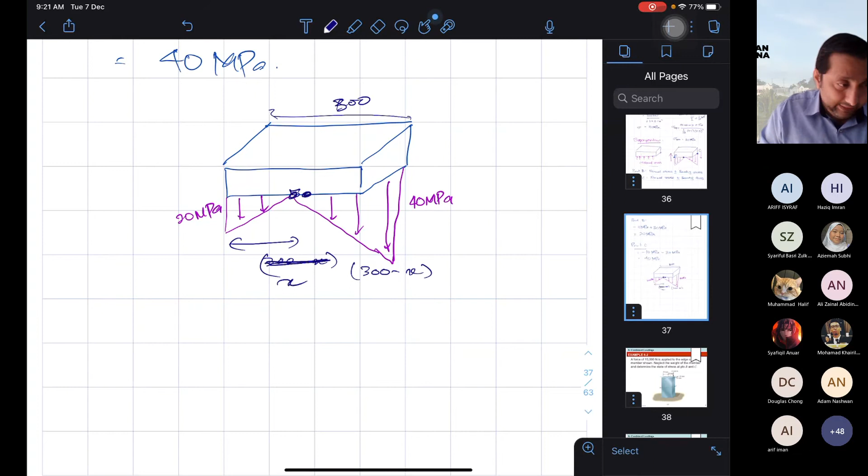So how do I calculate this now? I want to know the resultant stress distribution. I can do simple interpolation. The 20, if it's fixed here, for the distance of x, must equal 40 over 300 minus x, or this distance of x. So we can interpolate that to determine my value of x. What do we get for x, roughly? 100 mm, roughly. So that is my new center point for it to be in a stable condition.

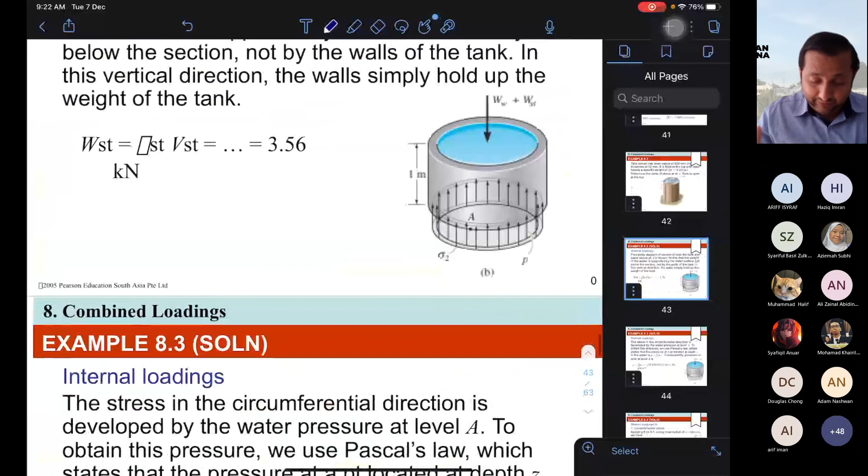So this thing is important. Why? Because you need to understand the concept of superposition, and also understand how superposition influences the stability, or also the centroids of the loads based on its point loading. So yes, there's an example here. I will give the slide tomorrow, not today, tomorrow. These are all examples of what we did just now, some examples here. So this one I will share tomorrow with all of you.